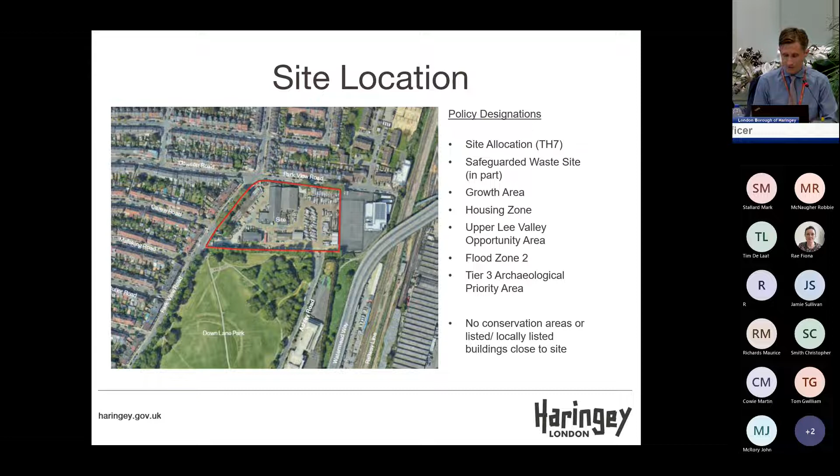So the site allocation, the application site is shown highlighted in red in the image you can see there, but the site allocation is slightly larger. Site allocation TH7, as mentioned previously.

So the main objectives of the site allocation are to provide residential and education uses, to re-provide the waste capacity elsewhere if it's removed from the site, to provide a pedestrian and cycle extension of Ashley Road, an improved edge to the park, to protect trees on and around the site, and to connect to the district energy network in the area.

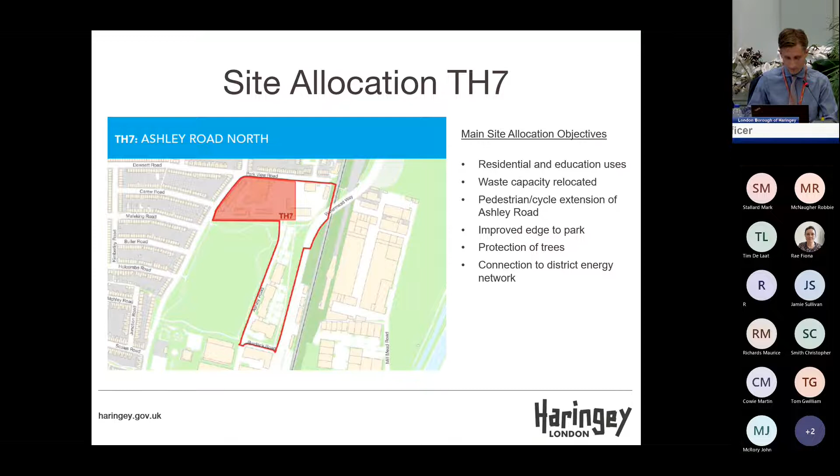So this site is part of the Tottenham Hale housing zone, and as such it contributes to the zone-wide portfolio approach to new and affordable housing. If permission is granted, the proportion of affordable housing for all developments granted permission within the housing zone area would total 39% by habitable room, which would ensure that mixed and balanced communities would have been achieved within the housing zone area.

In this aerial view of the development, you can see the development's layout in the form of 2 courtyard blocks and 1 podium block within a highly landscaped setting. All of the good quality existing trees would be retained and new soft landscaping would be provided throughout.

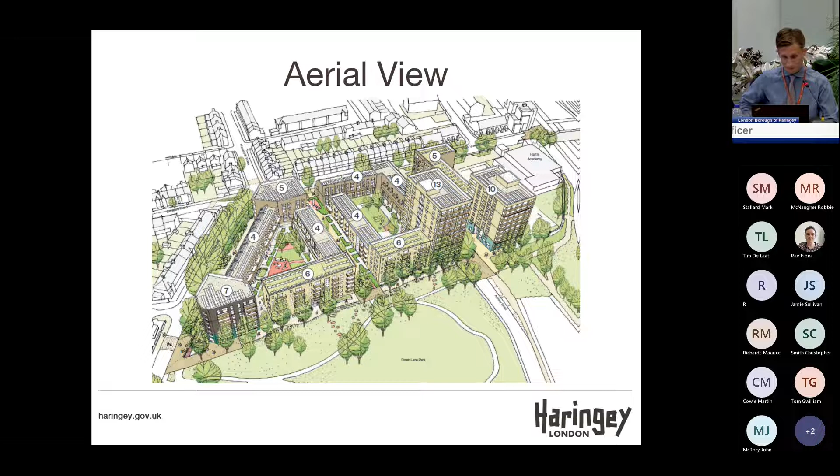All site boundaries around the existing site would be removed, and 2 north-south routes will be provided through the development, improving connectivity between Down Lane Park, the Lee Valley Regional Park, and existing residential neighbourhoods.

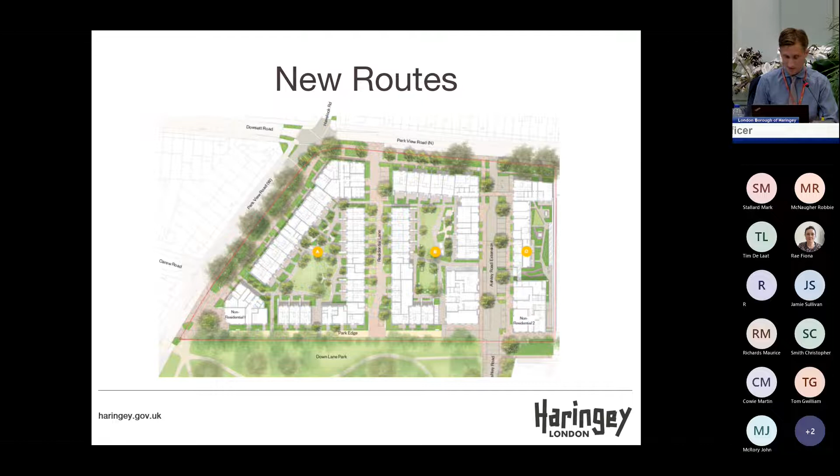This indicative plan shows how building heights would gradually decrease from a 38-storey maximum in the middle of the emerging district centre to 12 and 11 storeys on the southern side of the park. The proposed development, which is mostly between 4 and 6 storeys in height, would form an appropriate step between the height of the tall buildings in the district centre and the residential neighbourhood to the north.

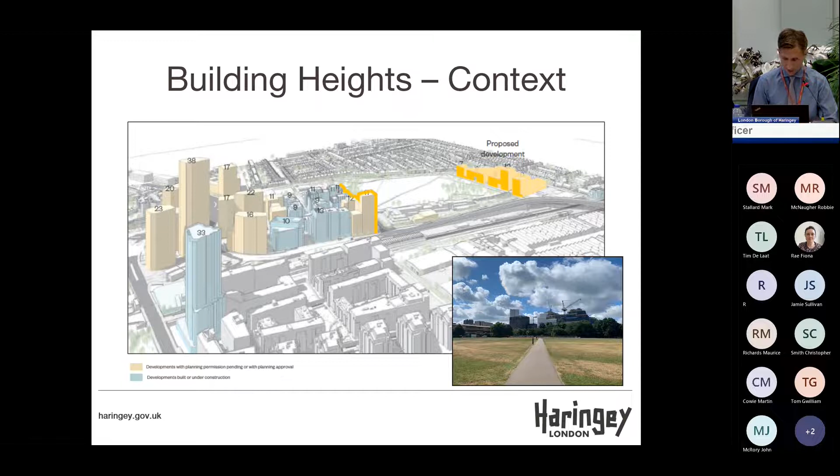The 6 to 7 storey building heights fronting the northern side of the park would work in tandem with the currently emerging buildings on the southern side to frame and define both sides of the park. The 10 and 13 storey buildings would improve wayfinding from the park and the wider local area towards extended Ashley Road and onto the Lee Valley Regional Park.

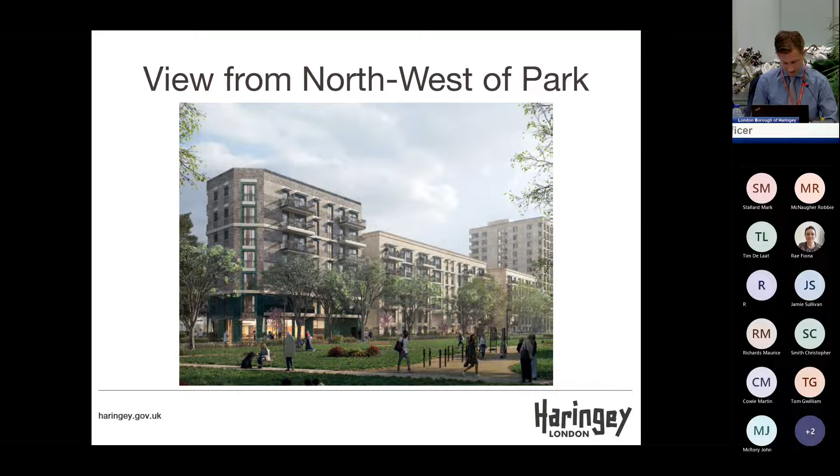This is a view from the northwest of the park, and it shows the relationship of the proposed buildings with the park. The boundary trees would be retained, and the 7-storey building on the left of the image there would include a commercial unit to provide natural surveillance to the park entrance.

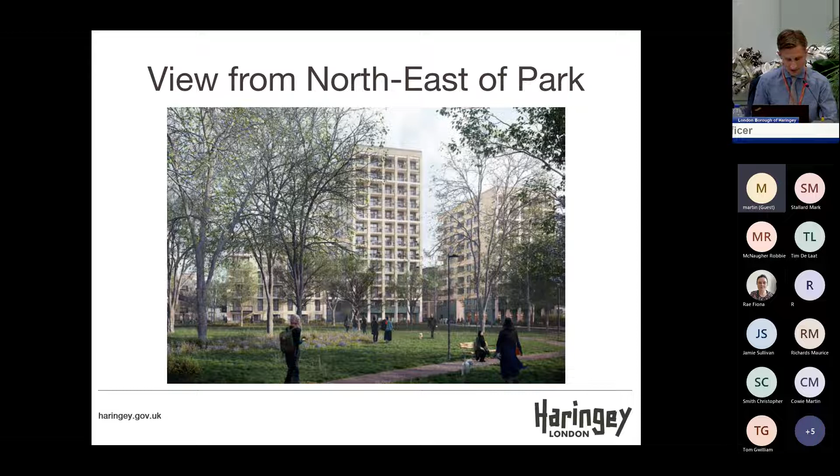This is the view of the northeast of the park, which shows the tall buildings which mark the gateway to the extended Ashley Road. These tall buildings are located far away from existing residential properties and enable heights on the northern and western sides of the development to remain low, while also maximising the number of council rent properties on site.

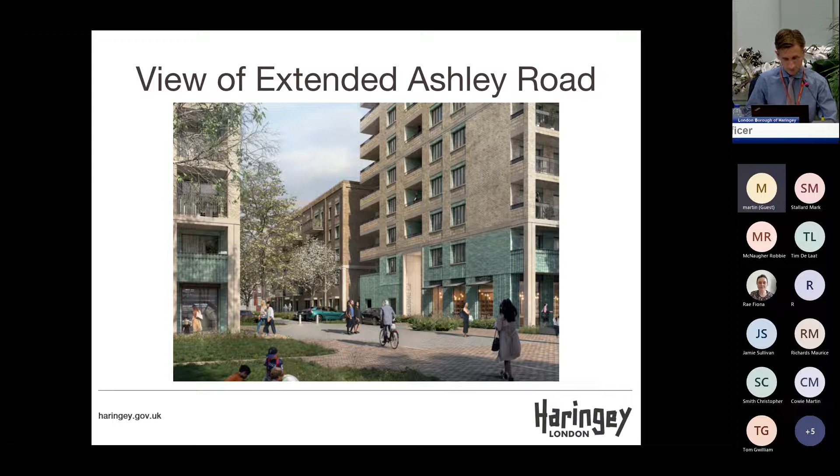There's a new publicly accessible route through the centre of the site, which improves access to the park for residents of the neighbourhood to the north. This route has a distinctly residential character, with front doors of maisonettes having direct access onto this shared communal space.

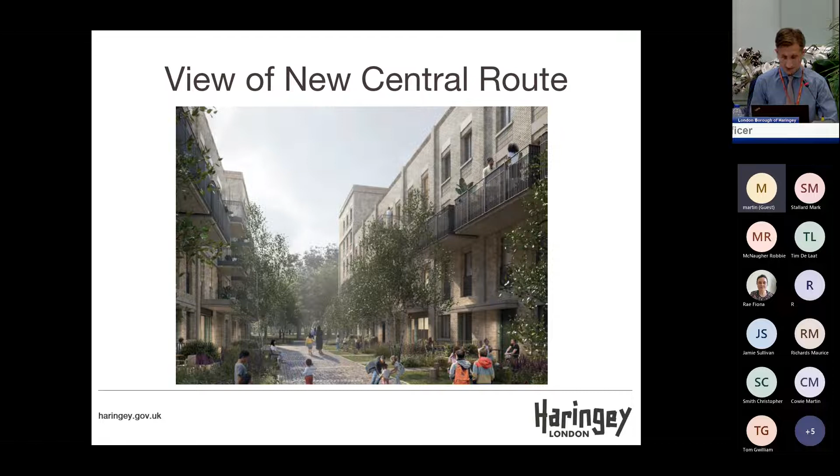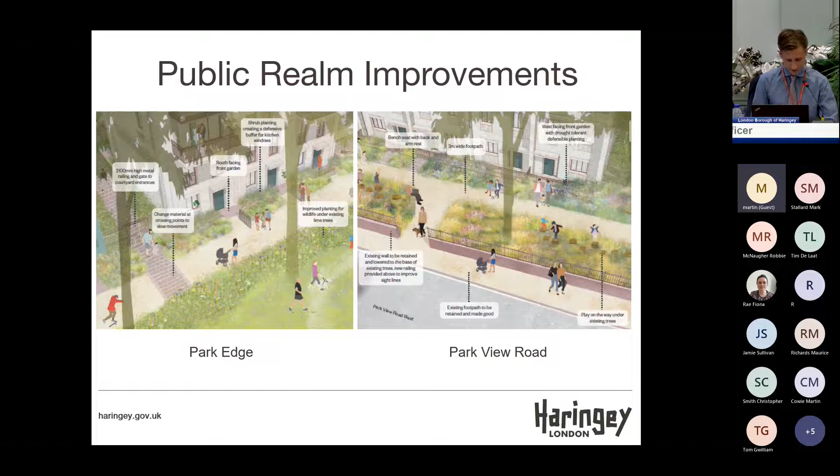These images show the public realm improvements in more detail, including the new open park edge treatment and the additional public realm and planting areas on Parkview Road.

Sorry. I don't know what's happened there.

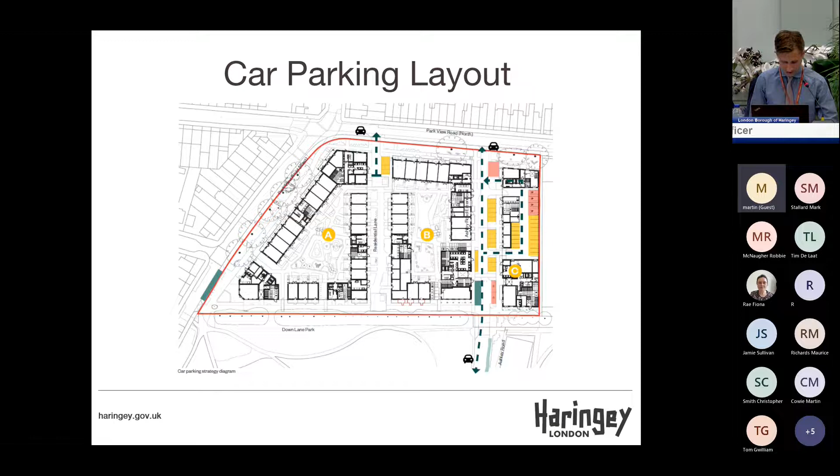Okay, sorry about that. 42 car parking spaces will be provided on the eastern side of the site, some of these within a podium. The blue badge parking is indicated in pink and the service bays are indicated in green. Wheelchair user homes will be located on the eastern side of the development to ensure they are in close proximity to the blue badge parking spaces.

So to summarise the key aspects of the development: it is a residential development provided in accordance with site allocation TH7. It provides flexible Class A uses which support the new and existing community. The education requirement of TH7 has been met through the Harris Academy, which is located entirely within site allocation TH7. The depot activities have been relocated to a new facility on Watermead Way, which recently opened. The recycling centre, which the waste designation covers, closed in 2018, and the waste throughput has been moved and consolidated to the existing council waste site in Wood Green.

In terms of the site's suitability for tall buildings, London Plan Policy D9 and Local Plan Policy DM6 require tall buildings to be located in designated areas. The site is located outside of the Tottenham Hale tall building zone, but it has similar characteristics to that zone, including good public transport access and close proximity to local amenities. It is within a growth area, a housing zone, and an opportunity area.

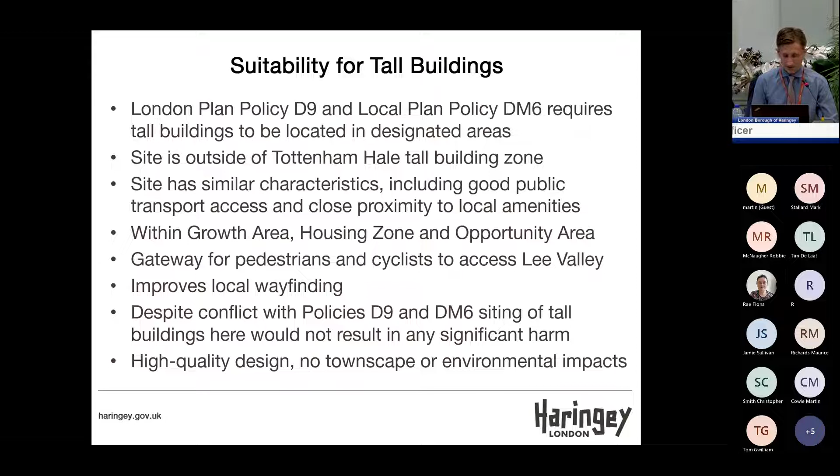The site provides a gateway for pedestrians and cyclists to access the Lee Valley. The tall buildings would improve local wayfinding, and therefore, despite conflict with policies D9 and DM6, the siting of tall buildings here would not result in any significant harm. They are also of a high quality design, and there are no townscape or environmental impacts.

In terms of the new housing, there are 272 new homes in total. 136 of these are for council rent, which is 50% by unit. 92 homes will be provided with 3 or more bedrooms, which is 34% of the total, and all of these 3 or 4 bedroom homes are for council rent. So in total, 63% of the homes would be provided for council rent by habitable room. That's 28 homes for wheelchair users, 18 of which are wheelchair user council rent homes, and the scheme overall is a tenure blind development.

So there is a high residential quality. It meets the London Plan internal and amenity space standards. 86% of the units would be dual or triple aspect homes. The blocks would have secure and well lit access cores, with lift access to all blocks. All of the wheelchair homes would be accessible by 2 lifts and located close to the blue badge parking spaces. All buildings are fitted with sprinklers. There is communal amenity and play space available on site, and other public open spaces available nearby as well.

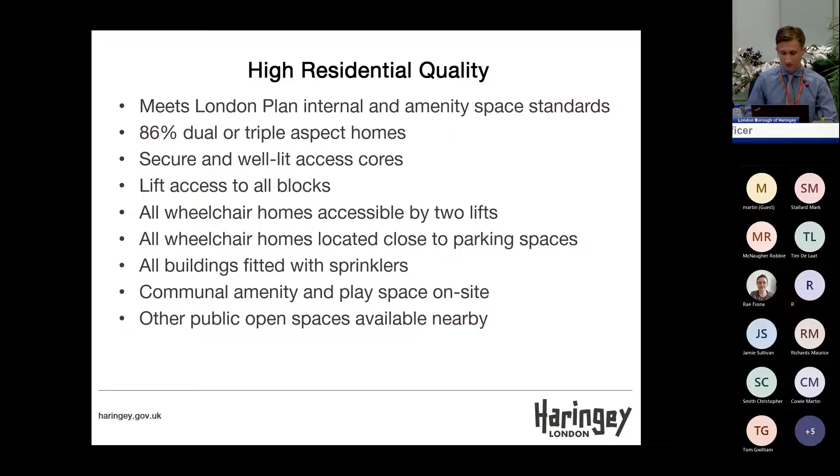The quality review panel has stated that it is broadly supportive of the current proposals, which have the potential to become an exemplar for future development in the borough. Since that review, the design has evolved further, responding to the panel's comments. There is strong support for this development from the council's design officer.

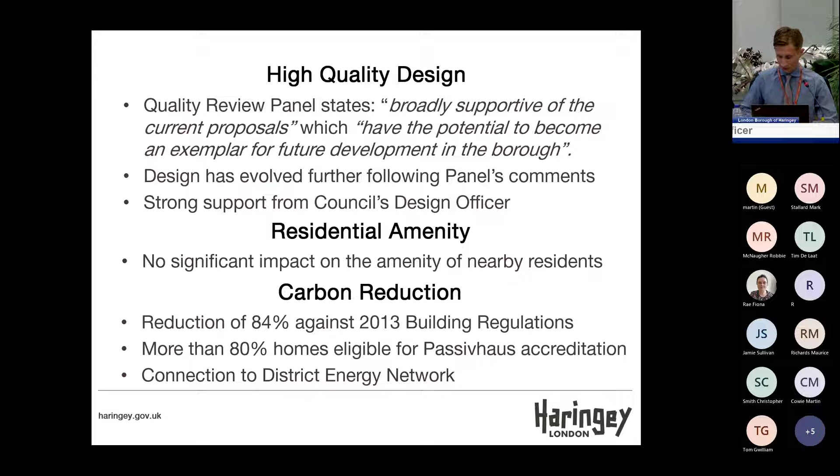In terms of residential amenity, there is no significant impact on the amenity of nearby residents. In terms of carbon reduction, there is a reduction of 84% against the 2013 building regulations, and more than 80% of the homes are eligible for Passivhaus accreditation. The scheme would also connect to the district energy network in the local area once it is available.

In terms of transport and parking, there are 42 car parking spaces, which is a ratio of 0.15. There are 8 blue badge parking spaces. The scheme would be car capped, so new residents would not be able to apply for parking permits in the local area, apart from users of the 42 car parking spaces.

There'll be high quality cycle parking provided throughout the development, and improvements to the public highway. In terms of public realm and landscaping, there are new public paths and soft landscaping provided around the site and throughout it as well.

There's a contribution provided to improve the underpass to the north of the site, which will improve access to the Lee Valley. The good quality trees around the site will be retained, and 74 new trees will be planted, and there is a significant net gain in biodiversity across the site.

In terms of planning obligations, there are a range of obligations secured, including 136 homes for council rent, a carbon offsetting contribution, a play space contribution, improvements to the public realm on the eastern and western sides of Down Lane Park, improvements to the underpass connecting Parkview Road and Lee Valley Regional Park, employment and skills initiatives as well, and other contributions as required by this application, totaling over £750,000.

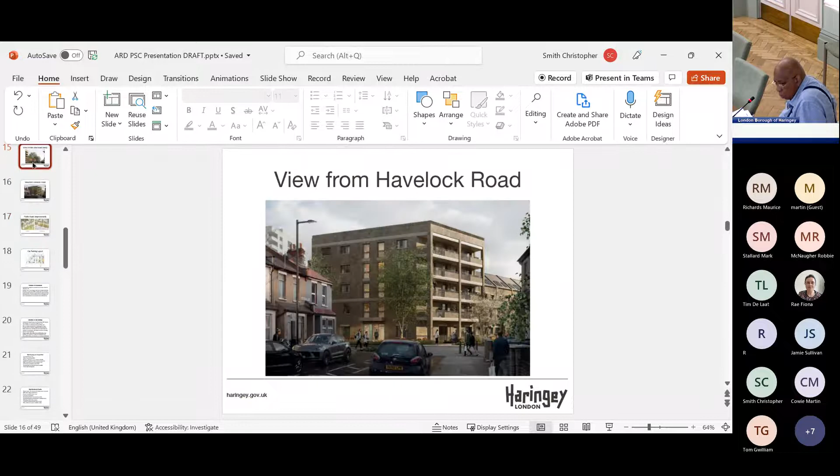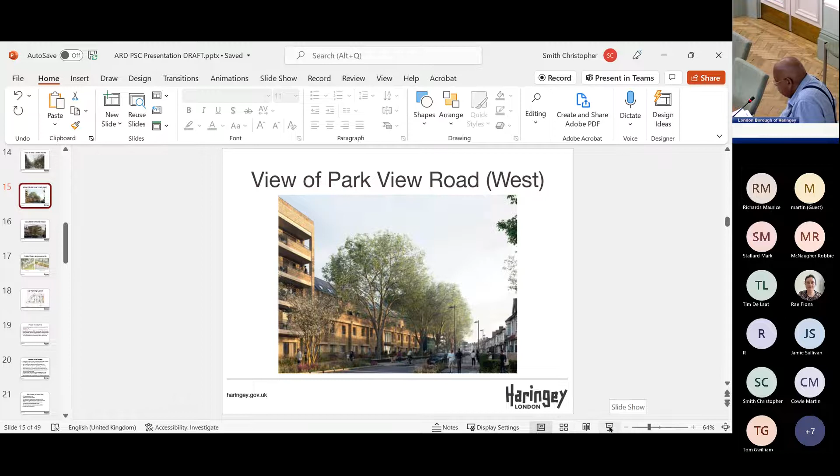The reason I'm asking for that: if you look at it, there's a high-rise building about 5 stories next to a 2-story building, but nobody's ever been consulted in North Tottenham about that. I live very close to this site. I would have expected, in normal consultation, to be asked what I think about it. Nobody's asked me. I think about it, and I'm not sure what happened.

Ruth would probably get an opportunity to say what happened to her group before this was submitted to the committee to make decisions. Just imagine suddenly finding out you live in that two-story building next to that 5-story building. You suddenly find out this is my next door neighbor, and no one has told me anything. So what's happened to it, fellas?

And just one little thing I found looking at the papers: the quality review panel, at page 27, says the panel would support greater clarity on the hierarchy of entrances and accesses to the buildings and courtyard spaces, to ensure that natural desire lines are defined and reinforced. What's this gobbledygook? What's this about? Do ordinary people understand that?

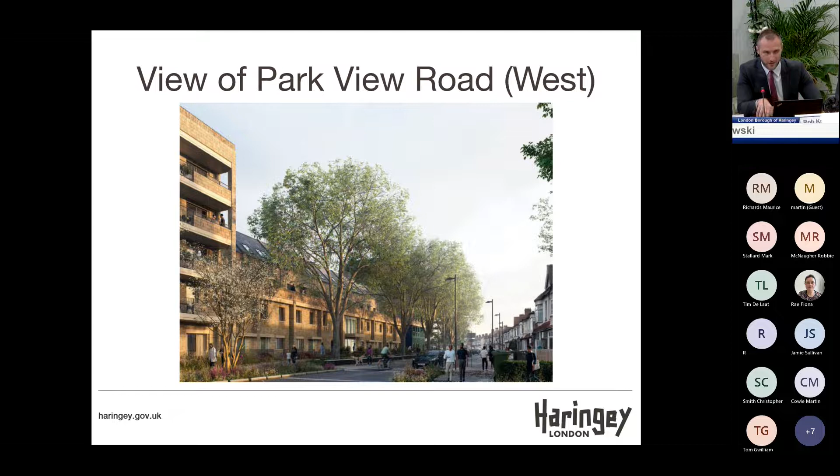Thank you. So councillor Rice, you have to leave the room now because you can't be here for the deliberations. As we have no objectors, we'll move straight to questions on councillor Rice's points. Right, thank you.

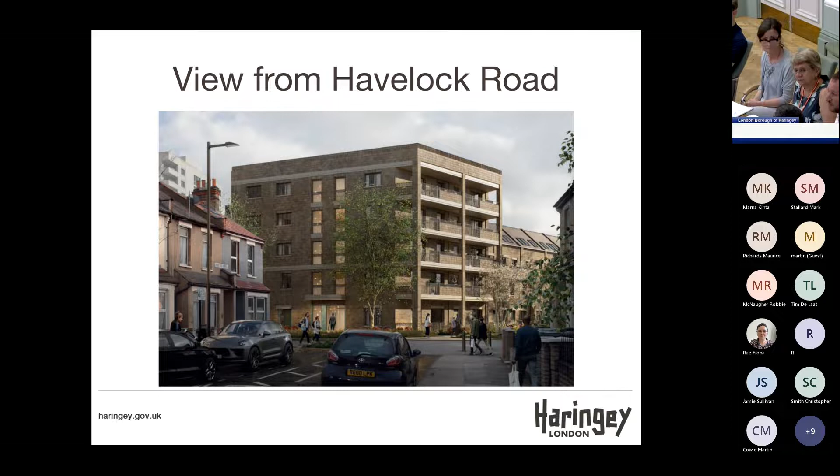One was on Passive House, which I think Joe can explain, and another one I'll quickly explain further to what Rob was saying about our pre-application engagement exercises.

We undertook two significant community engagement exercises before submitting last year, and we sent out 5,000 brochures locally. We undertook a variety of events to attract interest, and we did attract quite a degree of interest, which we subsequently acted on, changing the scheme and bringing the heights down, ultimately the density. As you can see from the papers before you, the application has resulted in a couple of dozen representations being made by local residents, some of which are letters of support.

So for a scheme of this scale, we feel we've handled the community engagement process reasonably well. I just wanted to highlight that there's a lot of background work done with the community before you saw the planning application.

Thanks, Martin. Should I just talk about Passive House? Councillor Aurora, that was something you quite rightfully raised. Yes, 80% of all homes achieve full certification.

The reason we don't have 100% is essentially for a number of reasons which the planning officer has set out, but essentially some of the buildings are smaller because of their context, facing two-storey residential buildings on Park View Road North, particularly Park View Road West. When you have smaller buildings, particularly ones that don't have flat roofs, we have a series of buildings where the top storey is tucked into pitched roofs, and we're doing that for contextual reasons so that it sits well in its setting and landscape.

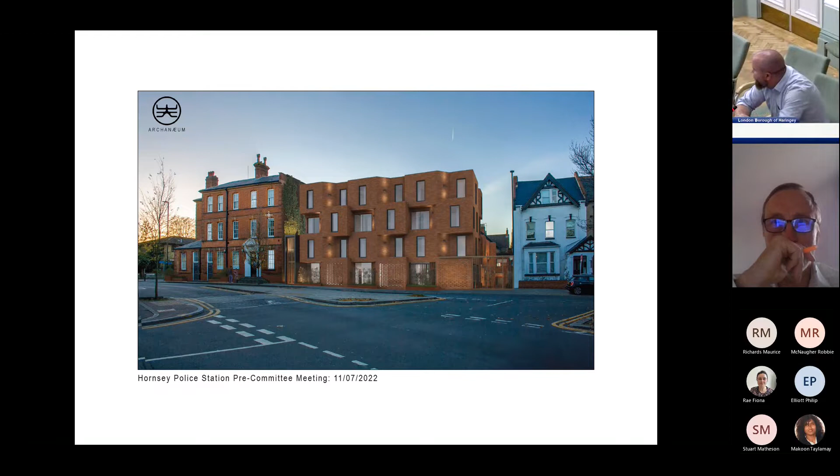So this is our scheme. What I'm going to do as part of the presentation, as well as present the scheme itself, is take you through our design process of how we've arrived at the development currently proposed. Next slide please, Rory.

So this is the existing site, the Hornsey Police Station, former Hornsey Police Station. It's a lovely old red brick Victorian building on the site as outlined by John. It does have some rather unsightly ancillary extensions done to it over time, and it sits on quite a large expanse of tarmac car park. A key image, in the top right, is this large gap in the street scene between the existing police station and the last building on Church Lane, which led us to investigate how it's gotten like this.

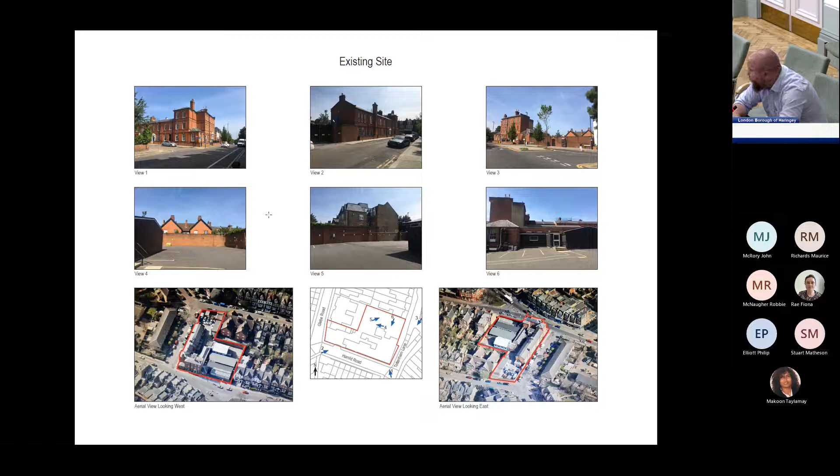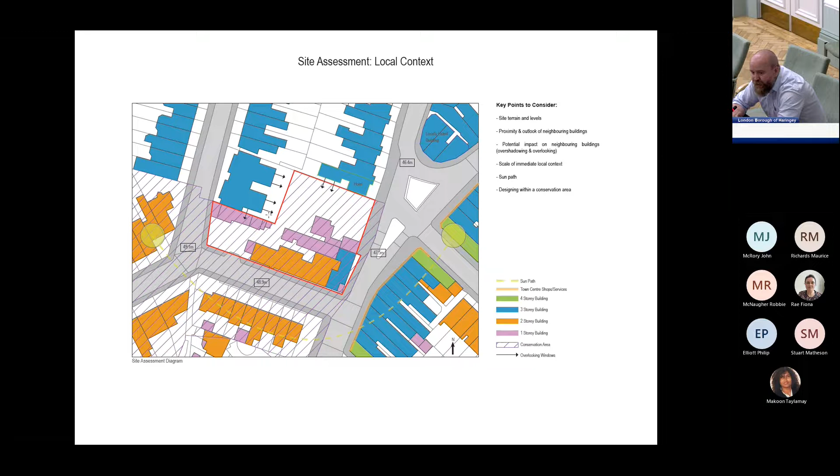Looking at the local context and immediate site constraints - we are in a conservation area, which we need to be very sensitive to. The scale and proximity of existing buildings, again, we need to be sensitive to, looking at locations of neighbouring windows and overlooking and overshadowing issues, which help dictate the placement of the buildings in relation to the sun path. Another key point is the terrain levels - from the top right-hand corner of the site to the bottom left-hand corner, there's about a 2-metre height difference. So we need to pay close attention to the levels with regards to access and thresholds into the buildings.

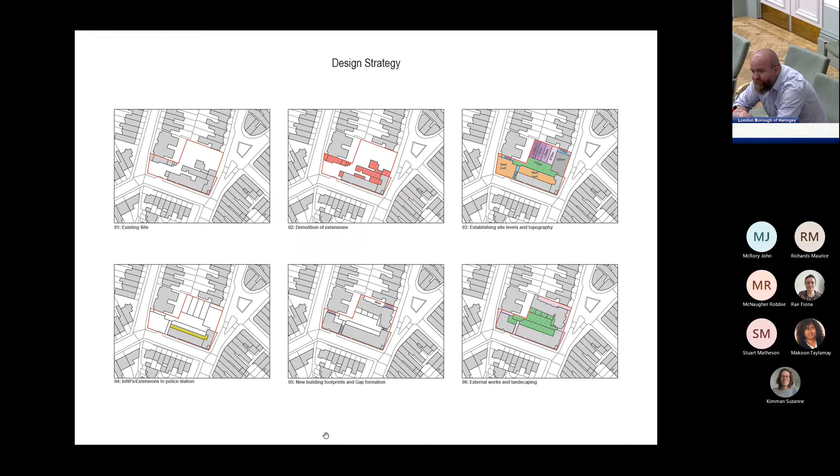Our design concept is weaving the past and the present, and this has both figurative and literal meanings. We are literally putting new buildings into a historic site, but it goes a bit further than that. By infilling these gaps, we are weaving back together the urban fabric within the existing townscape and helping bring that street scene back together in a more holistic form, which it did have historically before the civic buildings were demolished.

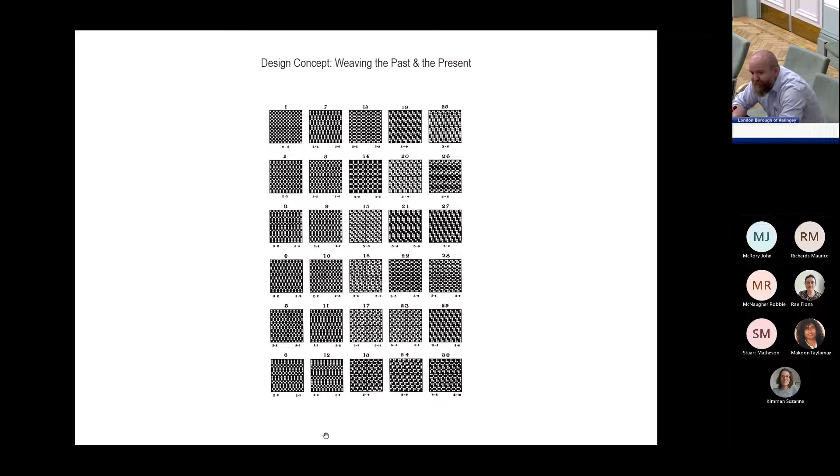This leads us on to an early stage of looking at the materials and form of the proposed building. Materials-wise, we're thinking brick — the existing police station's brick, and a lot of the surrounding area's brick. Obviously Victorian build methods were primarily brick too, so it seems like the right material to use.

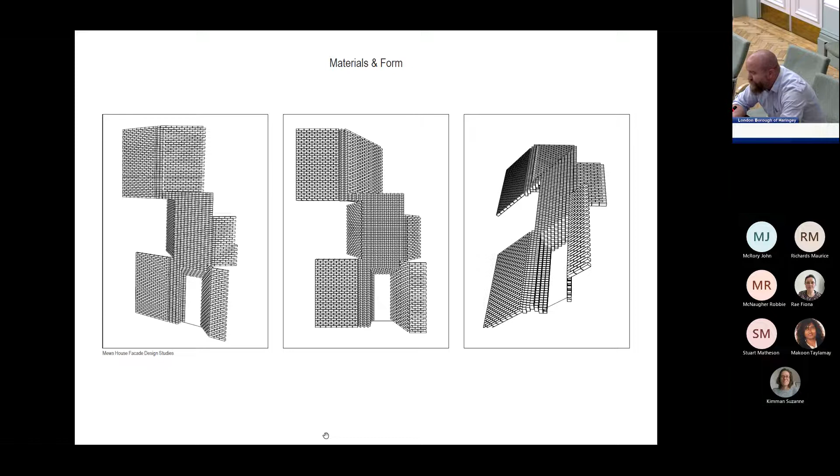Going into the landscaping, this theme of weaving continues. We have these more geometric patterns for the tiling areas, landscape paving stones, and other interventions within the site, taking some inspiration from the Giant's Causeway in Ireland, a very historic landscape site with very naturally occurring geometric forms.

But unlike the building elements, because it is a landscape, we wanted to help carry on that theme of weaving with these geometric patterns coming in lateral and vertical forms, and these extrusions to help replicate that.

Rather than have more formidable-looking two-meter high walls or something similar, we've got these nice green privacy screens, which do the job in terms of delineating between communal and private space, but also help create the whole landscaping look as one holistic landscaped area. Next slide, please.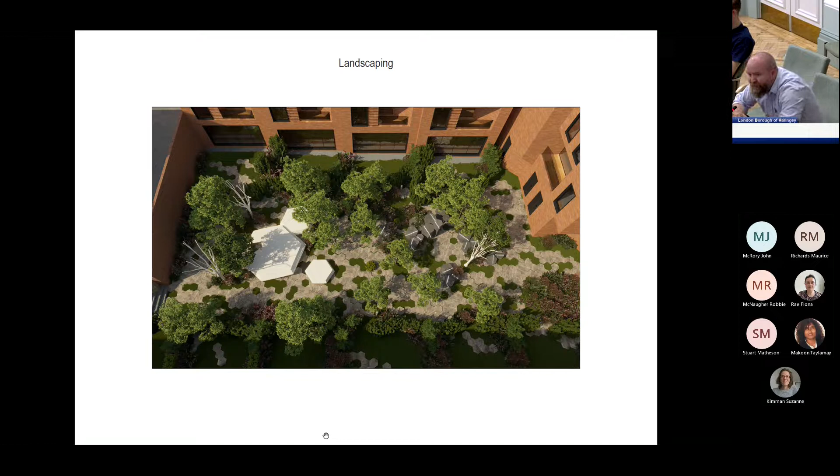On the scale and massing of the development, it's very integral that the police station maintains its prominence from a physical perspective on the street scene — we don't want to do anything to compete with that from a scale and massing perspective. Block A, in green, is the police station building, which will have terraced houses running down Harold Road. The element on the corner of Harold Road and Tottenham Lane would be converted into flats.

Block B, shown in orange facing onto Tottenham Lane, would be flats - that larger element - and then the new mews street behind with new mews houses. Block C on the corner of Harold Road and Glebe Road would be flats.

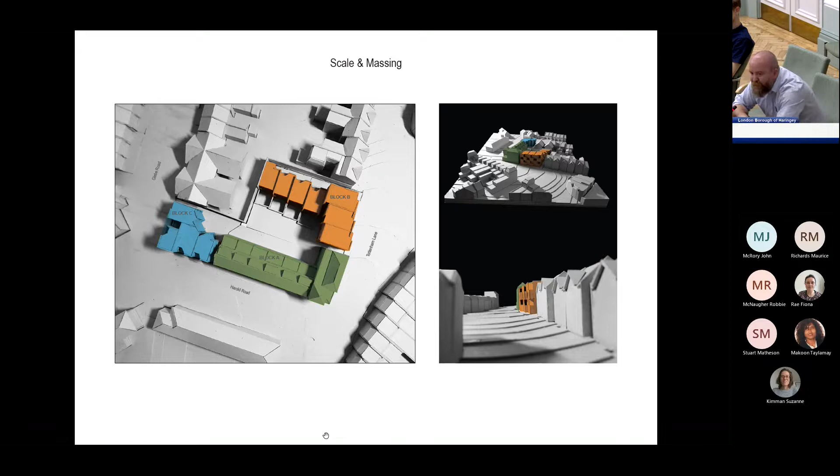If you've seen the bottom right image, when I mentioned before about taking inspiration from the street scene and form pattern, you can see how it staggers out with the existing buildings up Church Lane. There's a very clear pattern to the street, which is maintained through the new building to help bridge the gap between Church Lane and the police station.

So this is the Tottenham Lane elevation. You can see with the height of the buildings we are clearly much lower than the police station. We're also no higher than the neighbouring buildings on Church Lane. The rhythm of the setup - you'll see this clearer on the CGIs later - but there are 3 distinct volumes to this facade.

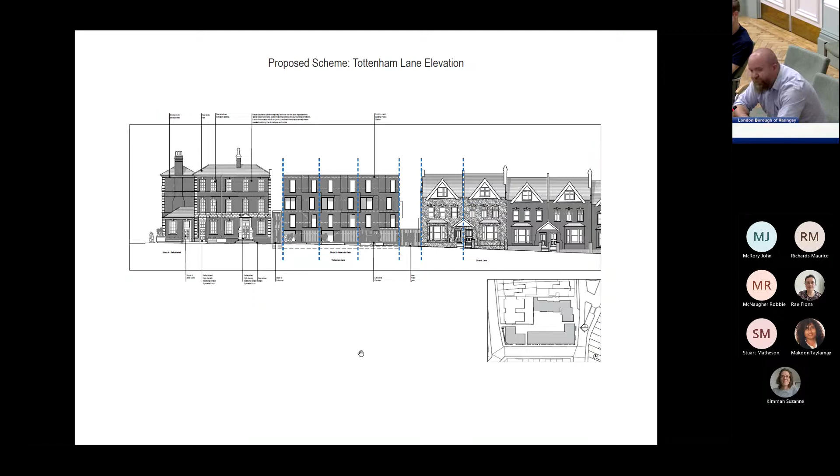Again, the rhythm has been set out at the same width as the individual dwellings on Church Lane. This is seen from the Harold Road elevation - block C on the corner, which is a bit more minimal approach with regards to the architecture. This is conceived not so much as an extension to the police station, but more of a continuation of the same architectural form. So the ridge height is maintained, the base of the pitch line is maintained.

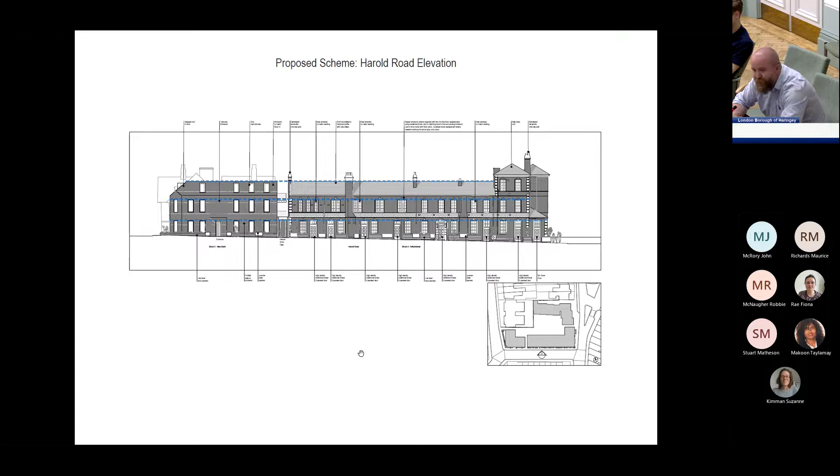The heights and setting out of first floor and ground floor windows is also maintained. But rather than it just be a pastiche copy of the police station, it's more of a modern reinterpretation of that traditional vernacular used in the police station itself.

This is the view from Glebe Road. Again, you see the scale of the proposed development in relation to the existing context. We are significantly lower than the fireman's flats and also the edge of the terraced houses continuing north up Glebe Road. You can see the outline of the police station building in the back, really bringing it down scale-wise to be more in line with the residential architecture in that immediate local context.

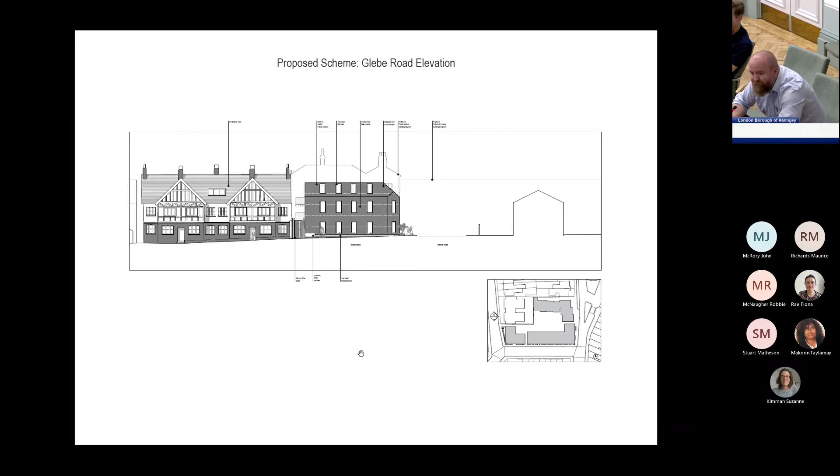This is the Mews Street elevation. You'll be able to see the architecture a bit better on the CGIs later, but the massing and scale of this, again, is significantly lower than the police station you can see in the background.

We're also taking inspiration from the topographies of the local streets, where all of the streets around there - especially Church Lane, Tottenham Lane and Glebe Road - are all sloping downwards as you access it from around the site. So we've incorporated a slight slope on the Mews Street as well.

This also has a few other benefits. The stepping down of the mews houses helps differentiate exactly where each house starts and finishes, giving it its own unique form. But also, once you get to the edge of the site boundary with the fireman's flats, it reduces the overall mass at the boundary of the proposal. This minimises daylight, sunlight and overlooking infringements on neighbouring properties as well.

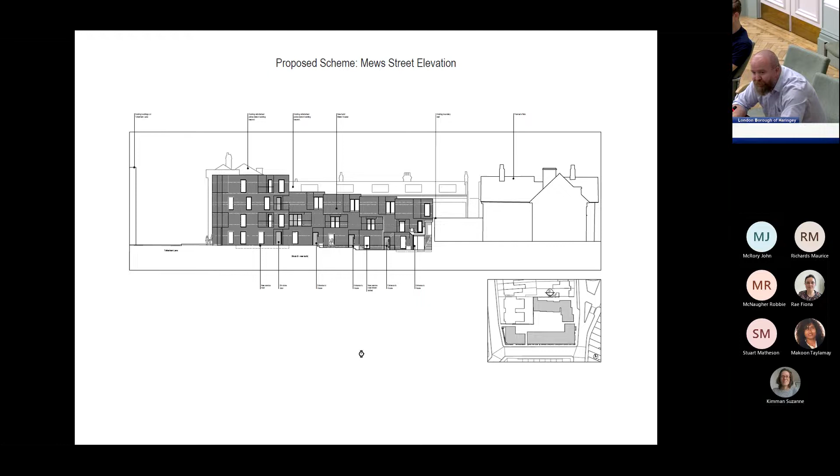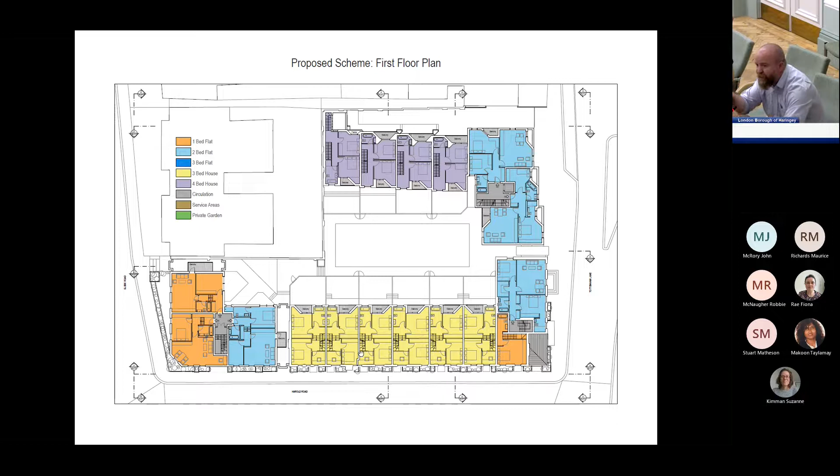Simply just the first floor of the developments. You can see on the back of where the police station is in yellow, that on the extension side, we're integrating that staggered elevation design onto the facade of that block. So again, it echoes the facades of the mews houses and the rear elevations on Block B. This primarily, so from the street, that traditional look is maintained because the building is being restored, but from within the site, there is a holistic architectural language that unifies the scheme.

Going up to the floors, you have the top floors here of the mews houses and townhouses, and the dark blue elements are two larger 3-bed family units as flats as well.

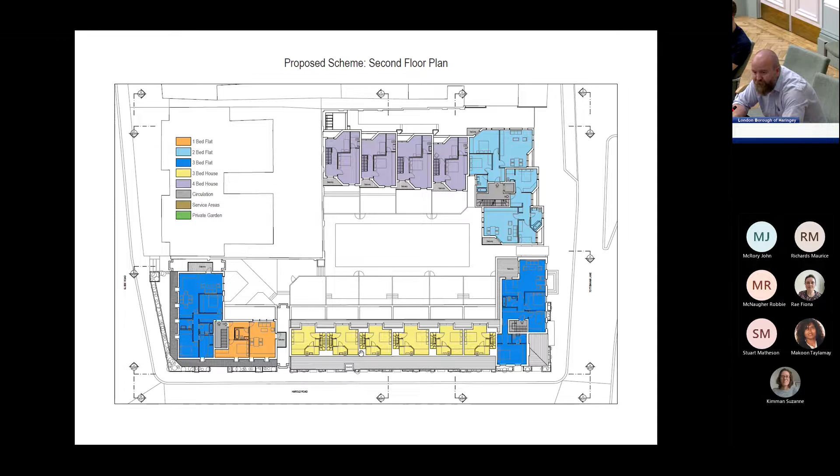And on the element there of Block B in blue, that's the only part of the scheme that is 3rd floor. Everything else is only up to two floors, 2 stories.

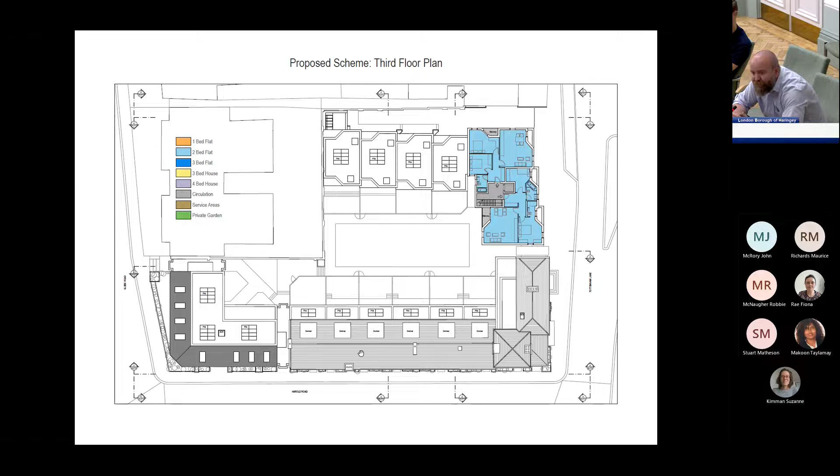So accommodation-wise, I appreciate you probably can't read that on the side of the screen, but we've made an emphasis to design the units with as much space as we can, rather than just scrape through on minimum standards. Only 2 of the units proposed meet the London Housing Design Code standards, and all the other 27 are in excess of minimum standards. This equates to just over 2,000 square feet in additional gross internal area for all the residential units. There are no single aspect units proposed at all, they're all double. We have 3 wheelchair units provided, which would be 2 of the houses in Block A and a flat in Block B.

We've currently proposed 28% affordable units, which will be the flats in Block C. We have done an early draft viability assessment for this, which was submitted to the council. We need to make some amendments to it now as we've changed the overall quantum of development. But it's worth noting the actual advice we received from a viability perspective is that the site couldn't house more than 4 affordable units. But obviously we want to try and escalate that as much as we can, so we've doubled that to 8 in its current format, which constitutes 28%. We do appreciate we're a little bit short of the minimum standard of 35%, but again this will be ironed out through a proper viability process through the planning application.

Consultant reports: we've done numerous consultant reports already, flood risk assessments, transport assessments, daylight sunlight, fire statements, which will all be submitted as part of the full application. I think with the time we have for the presentation, there is a lot probably to talk about with the local public concerns, especially with transport and parking and daylight sunlight, but maybe we'll come on to those in discussion afterwards.

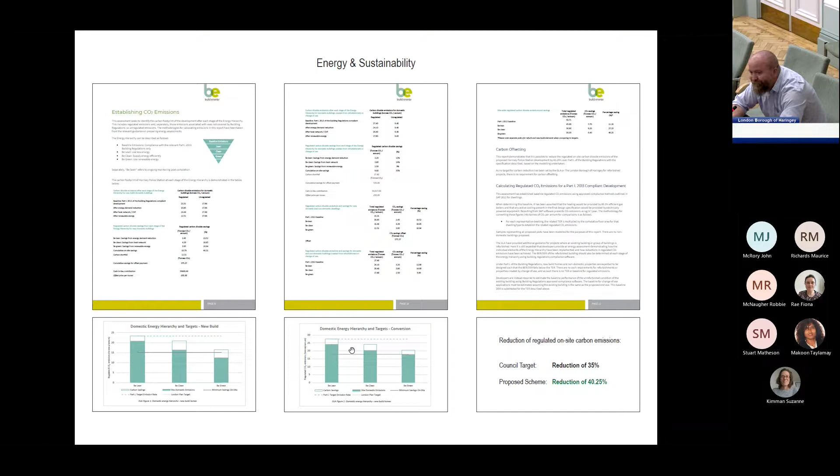So do members have any questions to the applicant or the planning officer? And that's Councillor White to start off with. Thank you very much, Chair.

So my questions are on how this proposed development fits in with Council Policy DM 49 on the provision and quality of community infrastructure. So first of all, to officers, my understanding is that in planning terms, currently this is classed as being a police station and therefore in community use. So my question would be, does DM 49 only relate to this in terms of its continued use as a police station, or would the policy also ask for attempts to be made to find some other kind of community use? And if so, what other kind of community uses would be acceptable?

And my question to the applicant is, in Policy DM 49 it says that evidence needs to be provided that the premises have been marketed for use as a community facility for a minimum of 12 months, and that no suitable user has been or is likely to be found. So my question to the applicant is, what has been done on this front so far? What kind of community facility have you been marketing it as, and what plans for the future do you have on this front? Thank you.

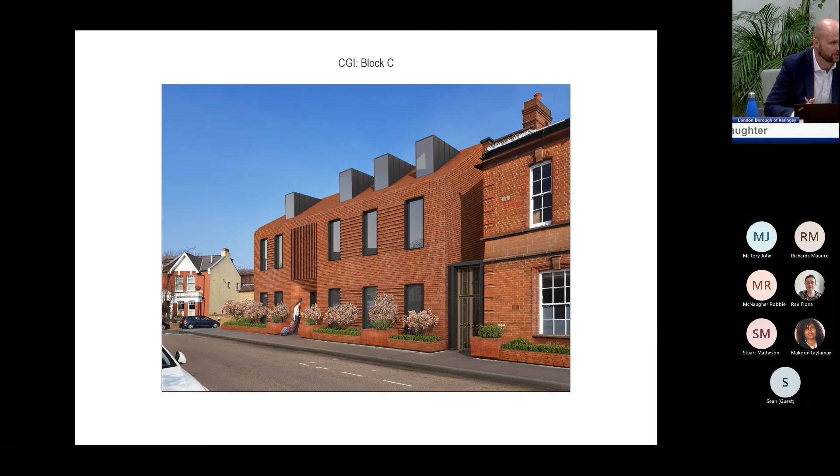And we can then decide, in our view, which is better, or upon your advice, which is better. Yeah, I do note that you raised that last time, and my feedback was that if it was on a listed building or something very sensitive, where the brick choice was absolutely fundamental, we would certainly bring that along. I don't think we've got that tonight as part of this pack. We wouldn't normally ask for a pre-app because it would be even further from being decided. But should there be an opportunity where we feel bringing a brick along or some details of materials is appropriate, we certainly can do that.

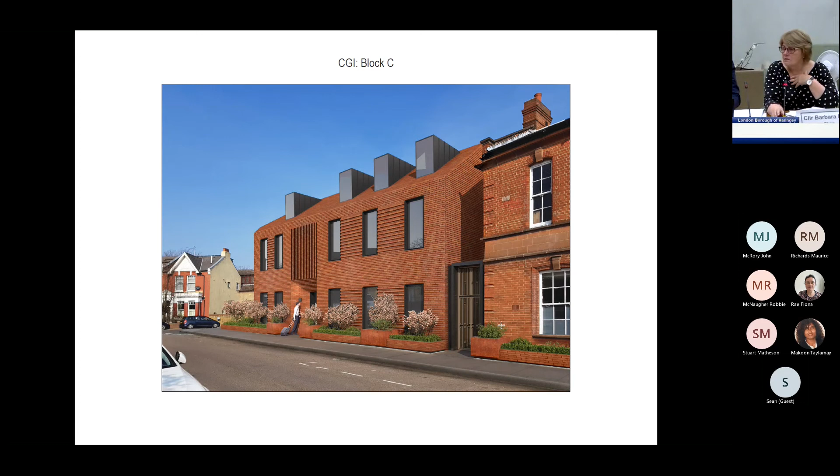So just a reminder, going back onto the use classification of the building with community - I think there's another point allocated in the first pre-app that was done, that it's officially allocated as sui generis rather than community, as the police station. That might be why there wasn't any requirement to demonstrate marketing for a particular time frame, 12 months, because it wasn't allocated officially as community use, it was sui generis. Okay, we'll need to look back at that pre-app advice, but yes, there is a definition in the development plan that sets out what we consider to be a community use, so we can have a look at that.